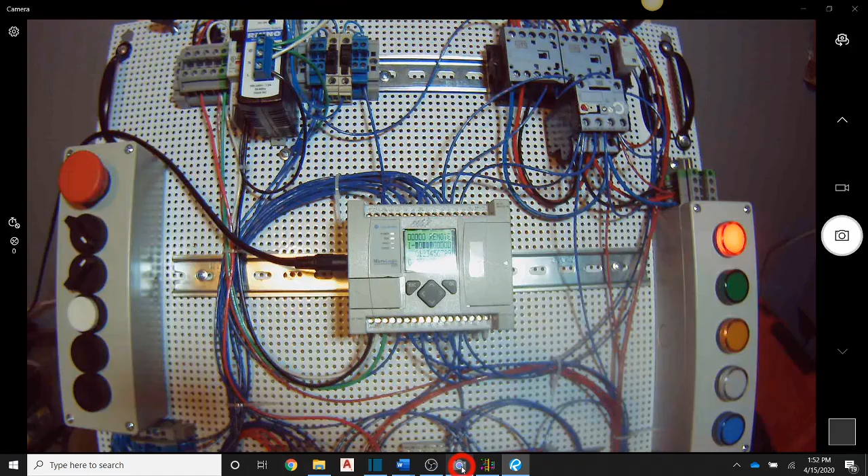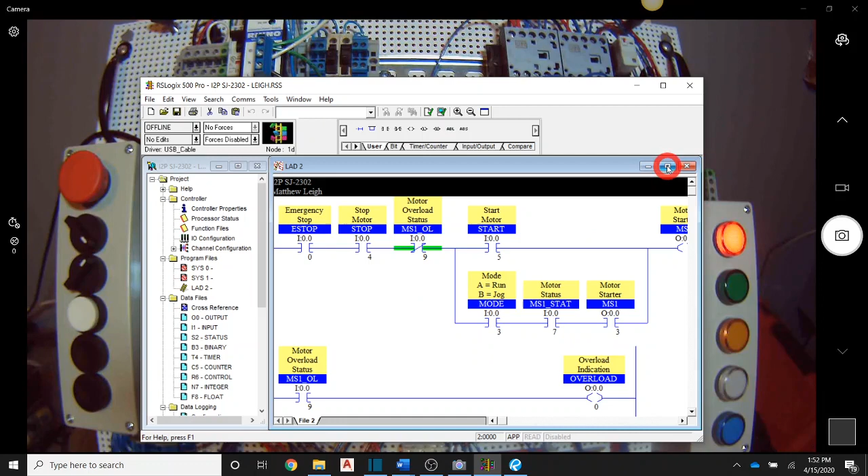Let's go over and look at 2301 and convert it to 2302. So we're going to save this as 2302. And I believe I already have one there, but we'll just overwrite it. Okay, we'll change this to 2302. Okay, so I'm going to maximize this so we can see it, and move this over. Okay, so

now first thing is we know that we don't have a selector switch for our jog functionality, so we're going to remove that. And we're going to have multiple things that are going to drive our output. We're going to have our rung for our run, and we're going to have a separate rung for jog. And since we have two things that drive one output, we're going to have to use binaries. So I'm going to come up here, and I'm going to substitute my output address for a binary address, B3:0/0.

Okay, and when we only have one direction, we typically call that forward. So I am going to call this run forward command, and it'll be beneficial when we get into reversing that I've already called this one forward. Okay, so it's going to be run FWD. Okay, and then that binary will also replace that output address that we have down here in the holding circuit. So the only way that we're going to hold ourselves in is if we were the ones that drove it to run forward.

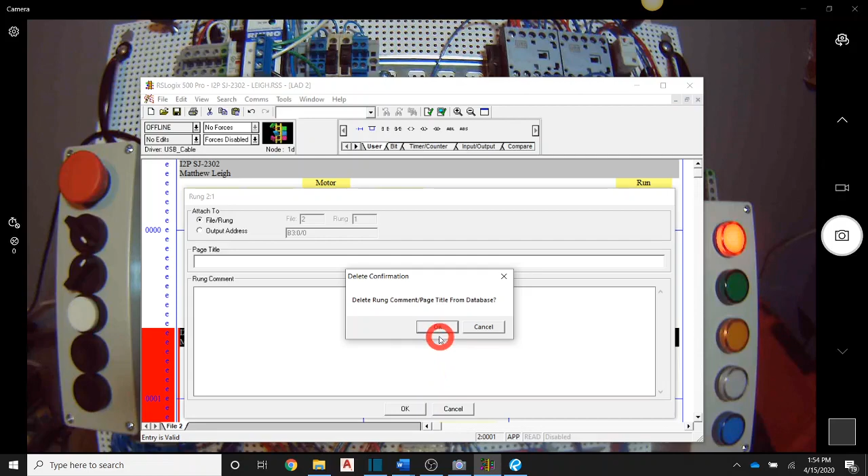Okay, so that's all of the changes that we need in rung 0 for changing from the previous job. If I come out here and give focus to that rung, I'm going to hit Control C, then Control V to copy it. We'll go ahead and get rid of our description here. And we know from previous jobs that the difference between run and jog is that we don't have this holding circuit in here. And of course we want to change this to our jog push button.

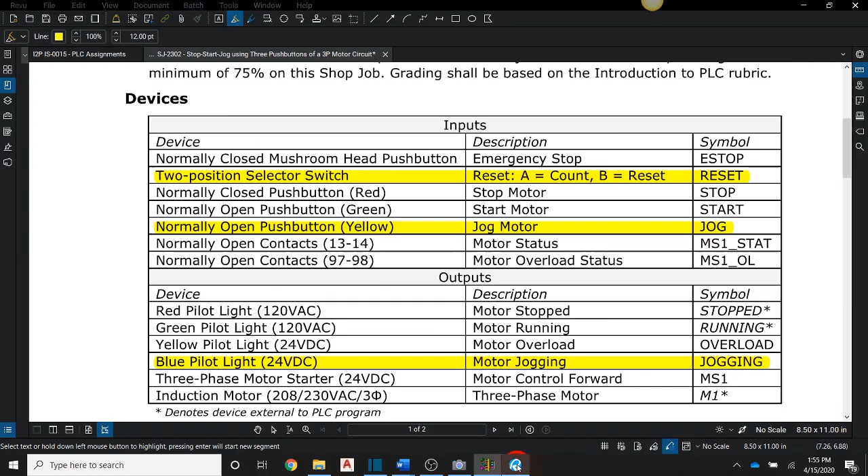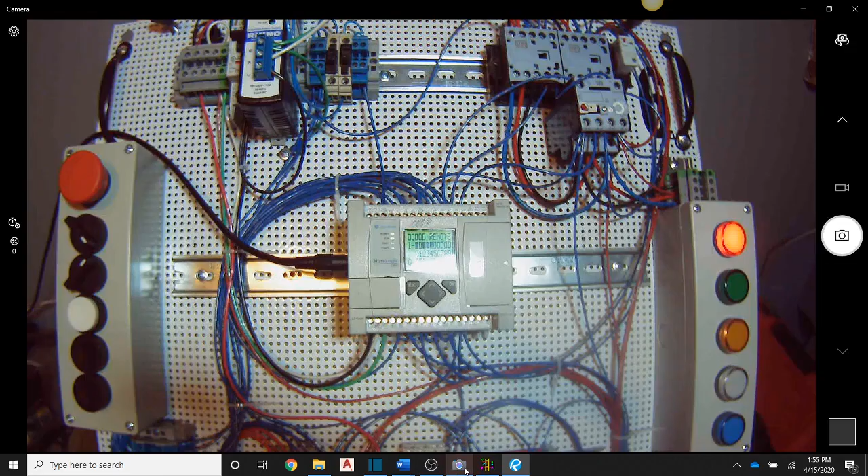And so we're going to put the assignment of 6. I'm going to show that here. This yellow push button here is going to be I:0.0/6. That's where I got that from. Okay. So we need to rename this, and this is going to be our jog push button. Okay. So now we have all the functionality that we need.

Of course, we want to include these other things in our jog rung. If E-stop is pressed, we don't want to jog the motor. If someone by chance is holding down the stop push button and the jog push button, we don't want to invoke the motor. And of course, if we're in an overload condition, we don't want to jog the motor either.

Now, this is actually our run forward command, and we actually want to assign a new binary here, and this is going to be our jog forward command. Okay, and I'm just going to symbolize this by JOG FWD. Okay.

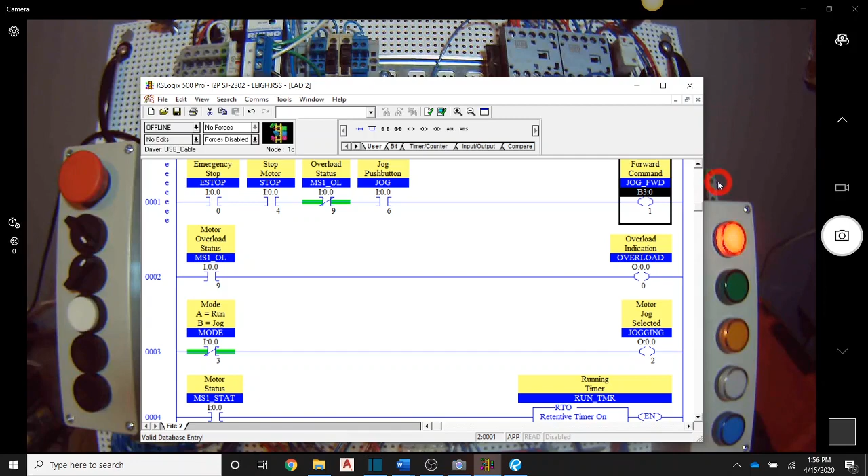All right, so we have some binaries established. We need to write those to the outputs lower in the program. And again, I usually put all of the decisions that need to be made at the top of the program for whatever final control element that we're controlling. And then I write all the outputs down at the bottom. And in the bottom, I always put the outputs in their address order. Makes it easier to find and makes the program rather organized.

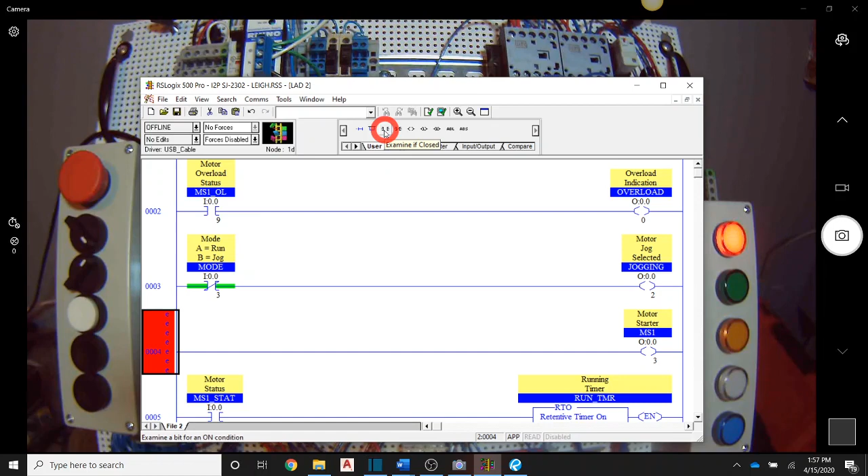Okay, so I am going to put focus on my blue light here, and we are going to insert a rung to actually energize our output, and we want to energize O:0.0/3. Okay, so that's my motor starter. And that's going to be in this particular panel, this motor starter right here to the right. And what we want to send there is one of two options that have been selected. One of them is going to be my

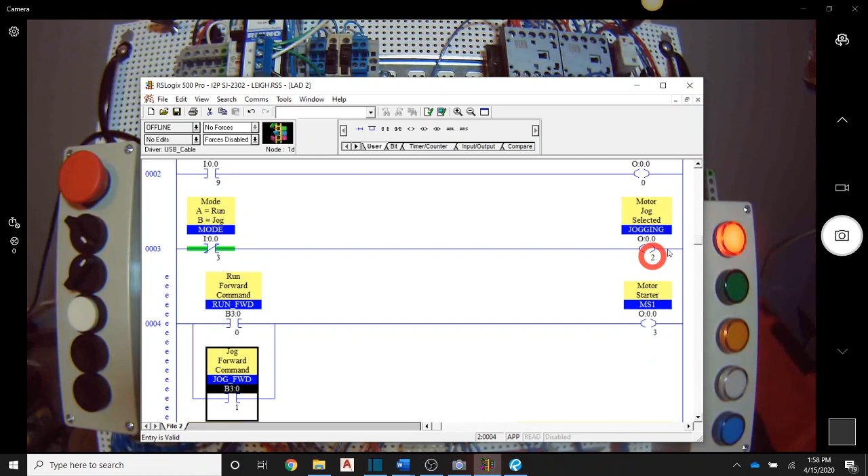B3:0/0, my run command, or whenever I say or, that means parallel, so I need a rung branch. And I'm going to put the rung branch below that, or we could say it's going to be B3:0/1. So that says or jog forward. So if I'm telling it to run forward or jog forward, I'm going to turn this thing on. The difference is one of those has a holding circuit in it and the other one does not.

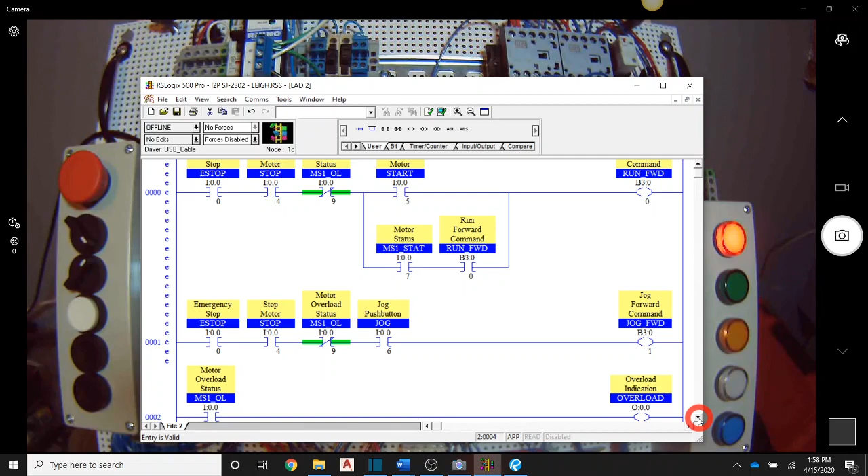Okay. We were able to accomplish this before in manual motor controls because we had a dual action push button, but we didn't wire up the yellow push button as a dual action. We just wired it with one input because it was unnecessary in a PLC. We can examine if open and examine if closed on one set of inputs. So we have our run forward and our jog forward commands ready to go. We have our implementation for our yellow light, which did not change. Our implementation for jogging has changed.

Okay, so we're going to get rid of this. Our selector switch no longer determines jog. And we're going to need a couple instructions here. The first thing we're going to need to test is if somebody is pushing on that jog push button. Now, just because we push on the jog push button doesn't mean that we want the jog light to come on. We want it to come on when they're pushing on it and the motor actually started.

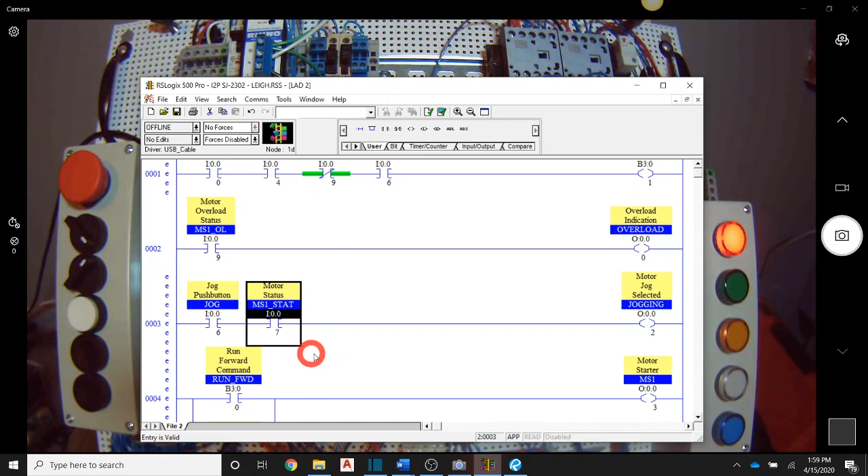Okay, so we want to come here and we want to go to that set of status contacts. If we push the button and those status contacts come back, then we will turn on the blue light. Okay, so now we have our jog functionality and the blue light indicating that functionality. Now all we have to do is set up our counter. So we still want to count the times that this set of contacts closes. So I'm going to hit the delete key to get rid of that instruction. And I'm going to come up here to my counter timer tab and select that. And then we want to select count up.

Okay. Counters use a different register than timers. It's the C5. And the very first one is just going to be C5:0, and we're going to call this our motor start counter. Okay. And I'm going to call this MTR space CTR. Okay, motor counter.

And a counter differs from a timer. A timer, once you get to the preset, it stops timing. A counter, when you get to the preset, it'll set the done bit. But if you continue to have motor starts, it will continue to count. So we don't necessarily have to put a preset in here. In my description, I don't tell us to do anything after so many counts. So we're just going to leave that at 0 for now, just so we can understand the operation of the counter. In a future lesson, we'll get into counting to a fixed number and then having something happen based on that count.

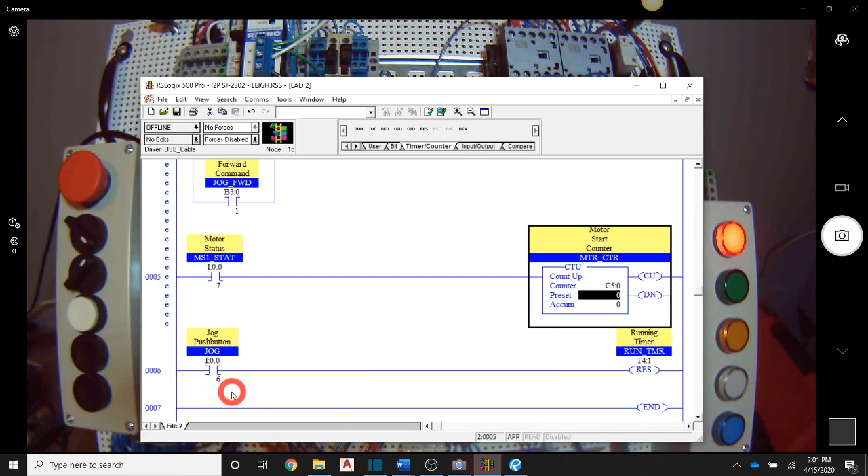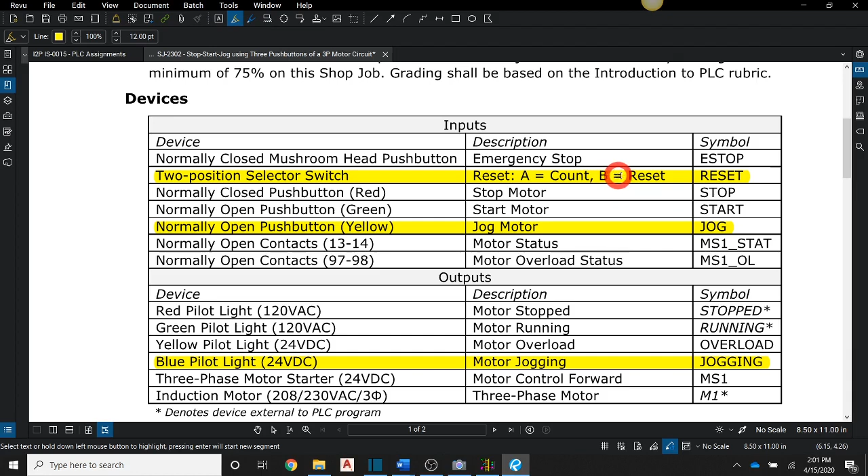All right, so this jog push button is not going to reset our counter. What is going to is our 2-position selector switch. I'm going to head back to our shop job here, and we have a reset based on this 2-position selector switch, and I want the B position to be reset and the A position to mean count. So here, the B position on the 2-position selector switch is open. Okay, so if we want B to reset, we want to examine if open.

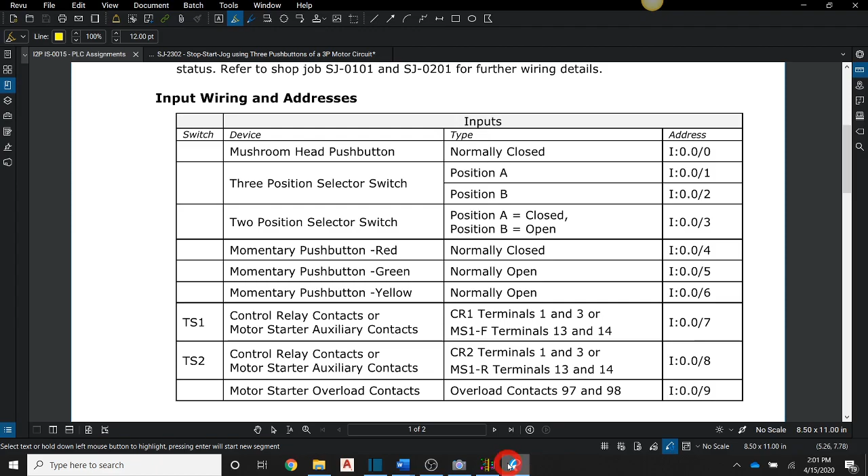I'm going to come back here and use my examine if open instruction. And this will be the selector switch, I:0.0/3. Okay. Previously that was our mode. Now it's going to be our counter reset. Okay.

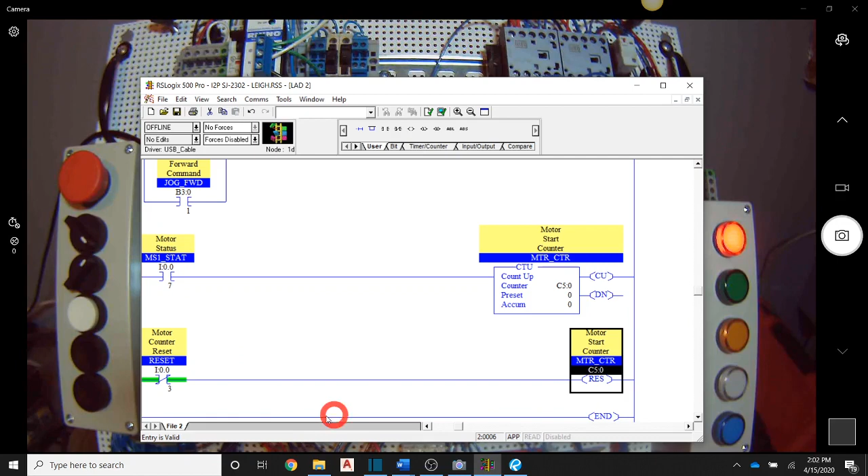And let's be a little more specific. It's going to be our motor counter reset. Okay. And then here, this reset operation can reset timers or counters. In our case, we want it to reset a counter. Okay. So now if we put the selector switch in the B position, this will evaluate to true, and it'll reset our counter, and we'll start counting from 0.

Okay, so I'm going to go ahead and download this, and we'll give it a shot. So we're going to come up to the top here, and the first thing I'm going to do is push what would normally be the green push button, and see that our start operation works. And you can see up here that it's a little hard to tell, but that moved, and we have our control relay for our lights that changed our light status, and we can also see that we're holding because we were the ones that invoked the starting of the motor, and the control relay pulled in. Okay, so that looks good.

And we're also going to come down and check our counter. And this closed. Anytime this closes, or a transition from false to true on this rung, we're going to count 1. So we actually have an accumulated value of 1. Okay, let's go ahead and hit stop.

And now I'm going to hit our jog button, and you're going to notice a couple things. Number 1, we're going to get a closed contact right here, but because we didn't push the button to invoke our run forward binary, we're not going to have a holding circuit here. We're just going to have our jog circuit. And let's go down and look at our blue light implementation. So on the blue light, if I push on the jog button and the motor actually closes, then we're going to turn on our blue light.

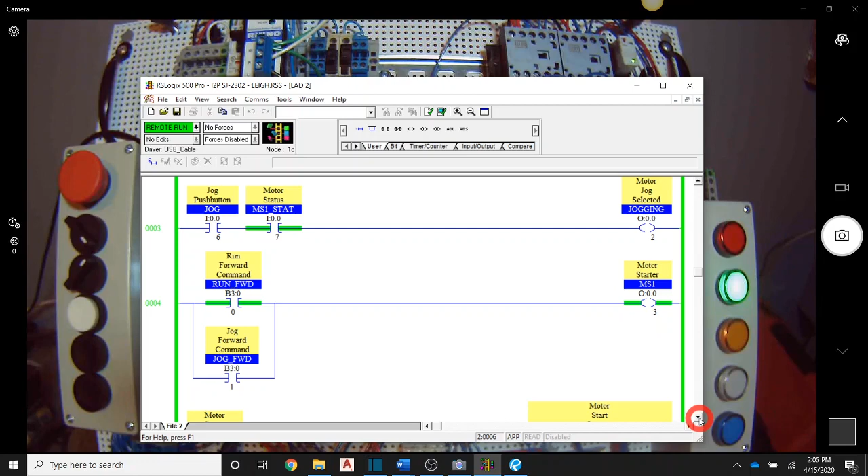Okay, and you can even see down here the 2 things that can actually start the motor. One is that jog forward binary, and then I'm going to go ahead and hit the start button here, and it's that start button. Now you can see why the blue light isn't coming on is because I'm not pushing on that blue light binary. Okay. And we have started the motor a grand total of 9 times.

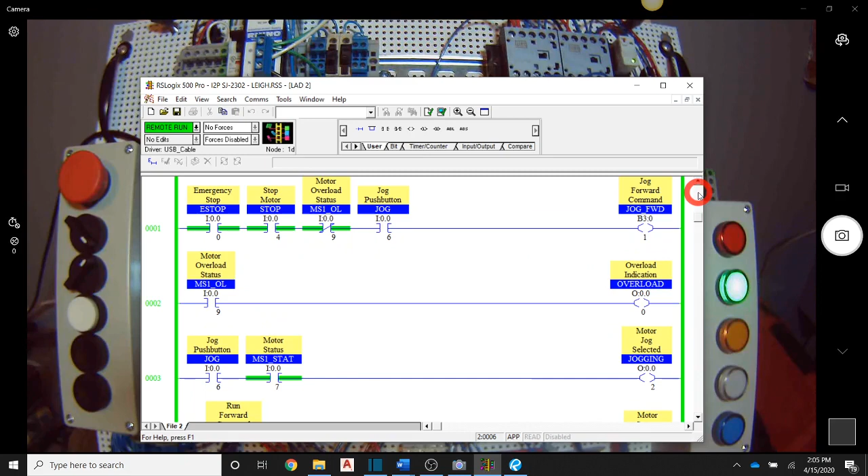So now what we want to do is test our reset and our overload. So let's test the overload first. So I'm going to come up here so we can see the overload take effect. Okay, so when I pushed on that button, it closed the set of contacts. This is an examine if open, so that was no longer evaluating to true. It broke my holding circuit and turned my binary off, which in turn drove or reset my output.

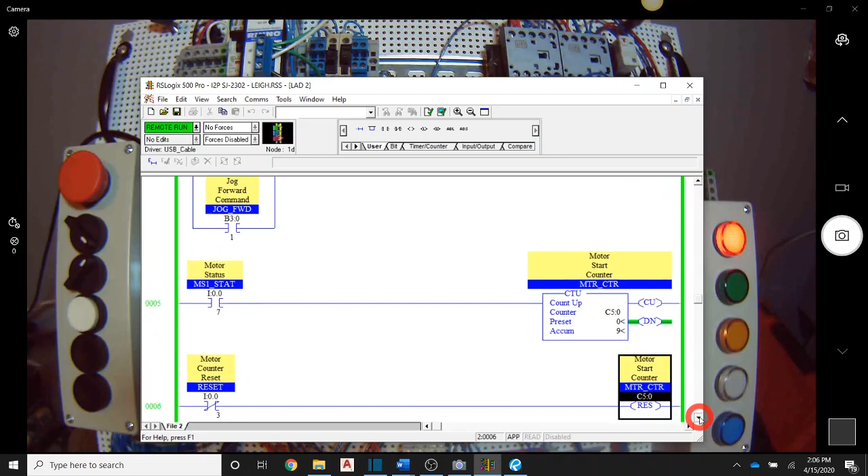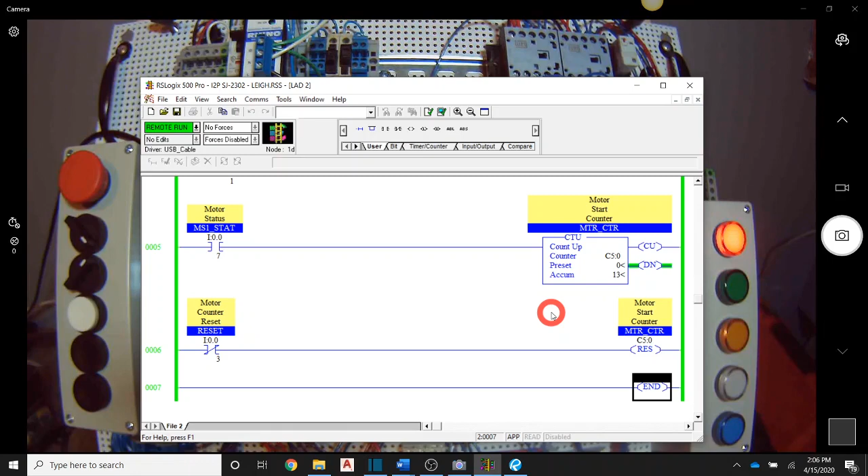So now let's reset our counter here. Okay, so I'm going to put the focus on the end here, and we have a grand total of 9 starts. I'm going to push the jog button just to make it an even 10. You can see it actually increment there as I start the motor. Now I'm going to go ahead and flip our 2-position selector switch over to the B position. And in doing so, you see that the accumulated value here was reset to 0.

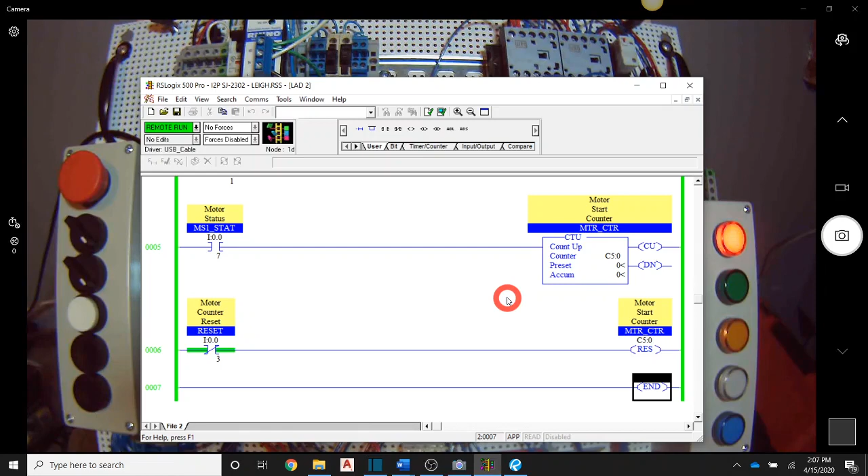Now, here's something that's important to note. If I leave it in that position and I start the motor, I'm not stopping my motor from running, but I am not counting. Okay, so that's something that you have to be careful of when you're using a non-momentary type input device to do a reset function. So now when I put it back to the A position, now it's going to begin counting. Okay. All right. So that is Shop Job 2302.